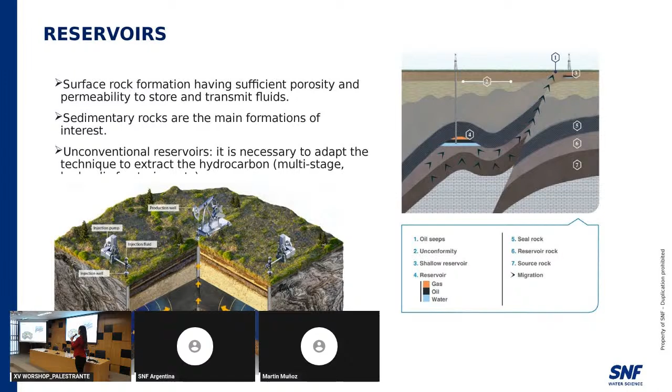We have a layer, let's say the reservoir layer in the soil, and we have injection wells where we inject fluids, and then we have production wells where we extract fluids. And we will not only extract oil, we will also extract water and gas. Okay, so this is a very important concept, because we will see that how much water we produce is very important.

Okay, so quick summary on stages of oil recovery. First one is primary, which is oil recovery through the own reservoir energy. I mean, if the reservoir has higher pressure than the atmospheric pressure, then we will lift it naturally, okay? So it will go to the surface naturally.

Also, we can have secondary recovery, which can be skipped and go straight to tertiary or EOR, but it's recommended to at least produce a bit by secondary recovery. Why is that? Well, secondary recovery is mainly trying to keep the reservoir pressure with water or gas injection. It's pretty much what we've seen here. We inject water, for example, and then we push the oil, and we produce a mix of fluids, okay?

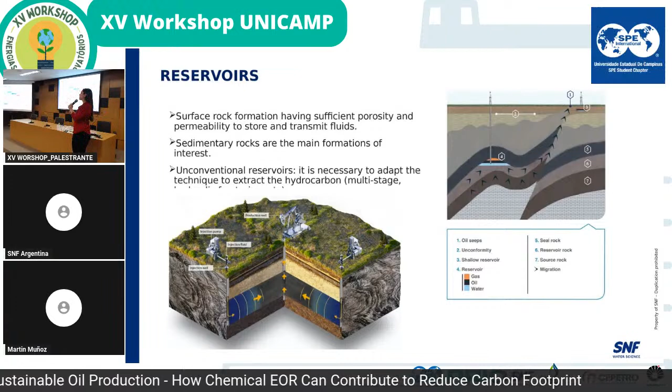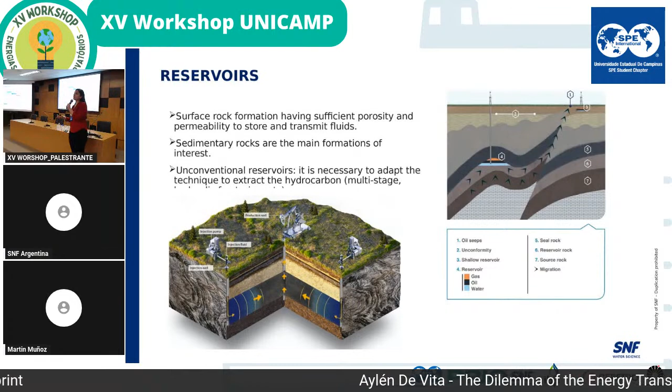EOR stands for enhanced oil recovery, which is when we try to go deeper, because secondary is not enough, or it's not cost effective, or we want to produce more oil, or we want to decrease water cut because we're producing too much water and we need to improve our percentage of oil.

So we have many ways of tertiary recovery, not just one. We have gas injection. You may have heard of carbon dioxide injection. Thermal, which is very used when we have very viscous oil, because it increases its temperature, so it lowers the viscosity. So lower viscosity, it's easier to move. And then we have chemical and other kinds of tertiary recoveries.

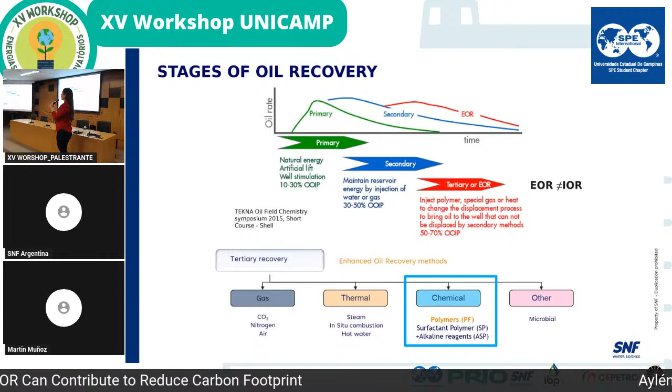We are going to focus on chemical, which is mainly polymer flooding. You are going to see PF many times. It means polymer flooding or polymer injection. And when I say water flooding, I mean secondary recovery. Okay. So we can also have surfactant polymer or alkaline surfactant polymer, but those are more advanced ways of tertiary recovery. We're going to focus on polymer flooding.

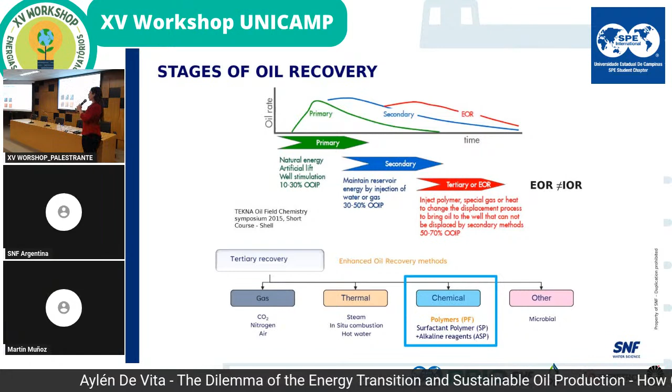So chemical EOR with polymer flooding is nothing but a viscous water flood. So I'm not injecting a high percentage of polymer. I'm going to show you right now what polymer is and what it looks like. But it's nothing but a water flood, more viscous. Okay. So basically we have this polymer that dissolves in water and increases its viscosity. And we have a very interesting effect.

I mean, you're going to ask, all right, so why do I switch to polymer? I could inject just water. Well, look at what water flooding looks like and what polymer flooding looks like. Polymer flooding reaches more surface with the same flow rate. So we can get through more pore space, and we can therefore get more oil in our production wells. Okay, why is that? Why does this happen?

Well, because we have this factor which is mobility ratio, which is basically the capacity of water to move oil, in simple words. So if we want to increase the mobility of oil, we can diminish water mobility. Okay, so to affect water mobility, we have to act on water permeability and/or water viscosity. So if we change both, this factor will be lower and we will move more oil. Okay, so this is with math and chemistry.

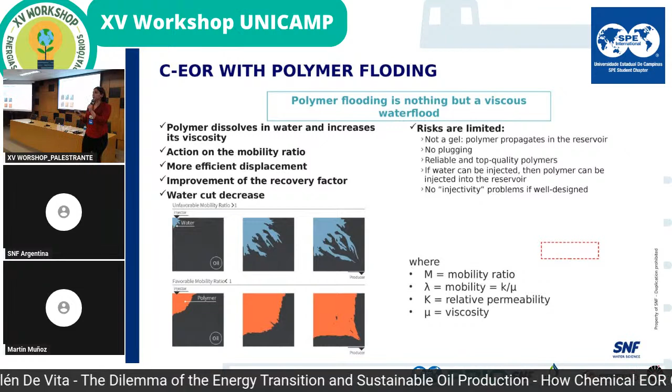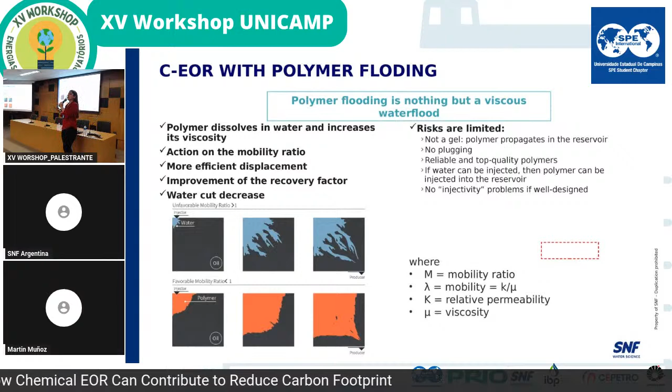Another good thing about polymer flooding, maybe you've heard of it, maybe not. Just for those who don't know and may have this question: hey, maybe I have a chance of plugging my reservoir? And the answer is no, I need a good design, but risks are very limited. Basically, if I can inject water, it's almost 90% sure that you can inject polymer too. You just need a good design and know your reservoir.

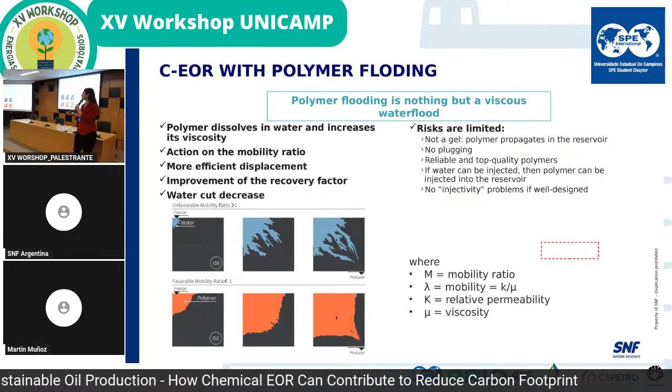So just a quick look on polymer flooding history, how we've evolved in the last 50 years. First, we have a few injections in the US in the 70s, and now, after a larger success in China and many countries, we have more than 300 projects all around the world right now.

Why did we have a larger success? Why did we evolve? Because we increased our application envelope. This is application envelope, I mean, where the polymer flooding can be implemented.

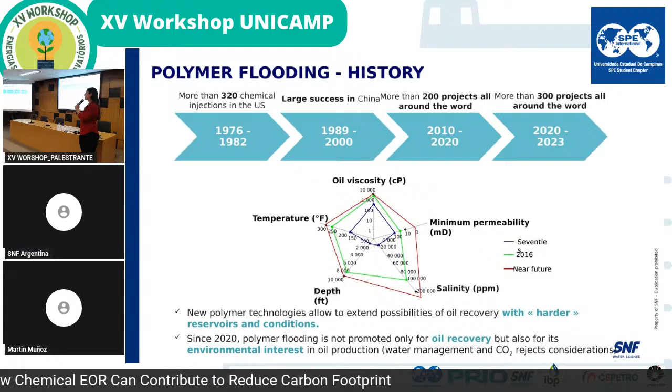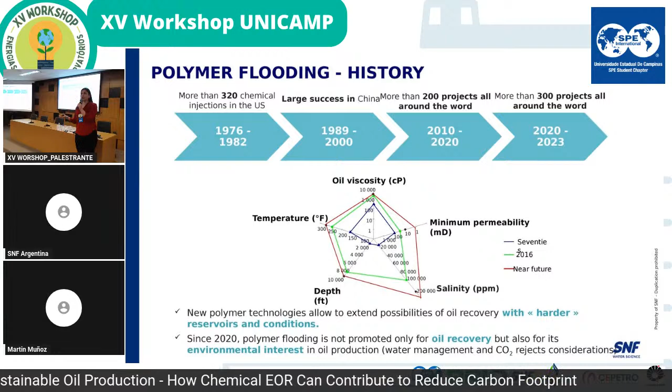In the 70s, polymer flooding could be implemented only in certain conditions of temperature, permeability, depth of the well, oil viscosity, and we have in the last few years increased that envelope of application because we have developed better chemistry, polymers that can stand and cope with harder conditions. So now it's almost possible to implement polymer flooding in every field.

So what are polymers? You may have heard this word before. It's basically repeated units of the same monomer. So we're having these monomers in chains, long chains, with a high molecular weight.

And for EOR, we use acrylamide-based polymers, not just any polymers. And the average molecular weights are between 3 and 35 million Daltons. That's a lot. And that molecular weight will give us more or less viscosity.

We usually use anionic to minimize the adsorption in reservoirs. And this is an example of how an anionic polyacrylamide looks when we join, let's say, acrylamide and acrylic acid, for those who like chemistry.

The important thing about polymers, I mean, why we use polymers and not something else? Because we care about this property, which is non-Newtonian fluids. Maybe you've heard that in some physics class. If we have Newtonian or non-Newtonian fluids, they behave differently. If we apply different shear rates, like efforts in a fluid, the viscosity may change or not.

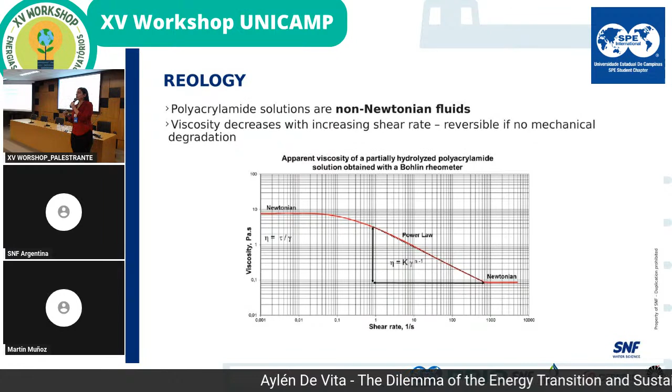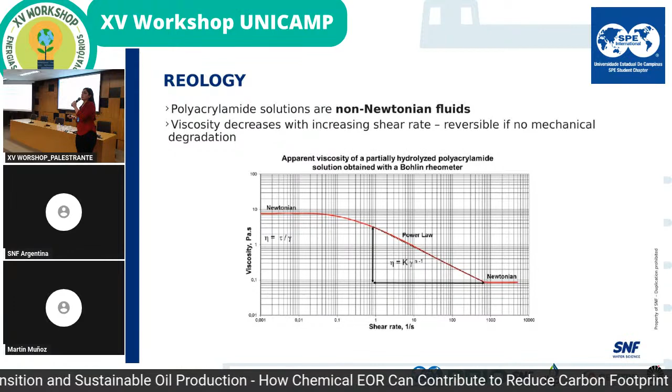In water, for example, it doesn't matter the strength I apply to water, it will always be the same viscosity. But with polymers, we have a decrease in viscosity at higher shear rates. So if we apply more strength to a polymer, it will diminish the viscosity. So this is a particular thing about polymers.

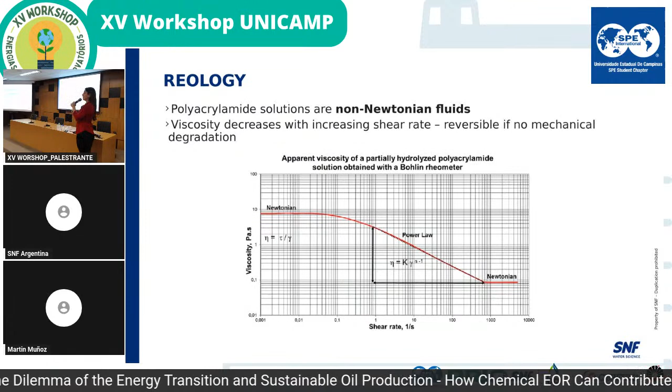They're called pseudoplastic fluids or shear thinning. You may have heard any of those concepts. And I'll show you now why we can tell visually that they're pseudoplastic, because I have polymer here. Okay, so let's get a bit more visual.

Polymer can be in two different forms for EOR, which are powder and emulsion. The main difference is, well, of course, one of them is solid, the other one is liquid, but the solid is 90% polymer, let's say active content, because we have 10% of humidity. So this is how powder looks. I'll give it to you to look at.

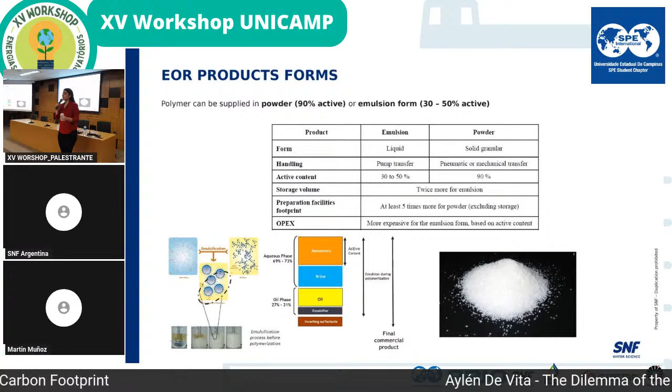So we have powder, which is 90% polymer active content. And then we have emulsion, which is liquid. So emulsion is 30% active content. And you will say, hey, well, why should I take emulsion if powder has more active content? Well, it depends on each case which one is better for application. Okay, I'll tell you now.

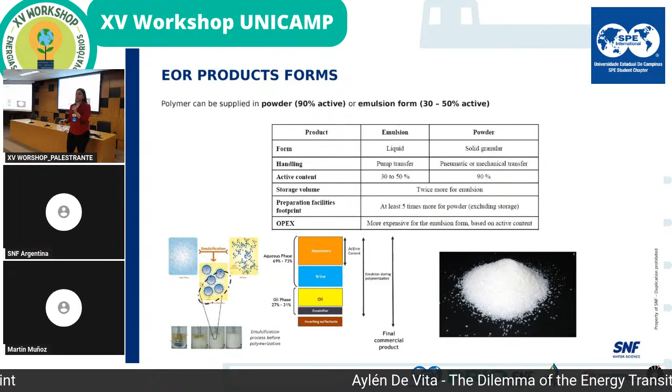So the main differences are active content, form, and how we transfer it. The emulsion can be pumped and the powder has to be hydrated. We cannot inject powder like that. We need to inject a fluid, so we need to hydrate it first. But the good thing is that we will diminish OPEX because we won't be transporting so much non-active content.

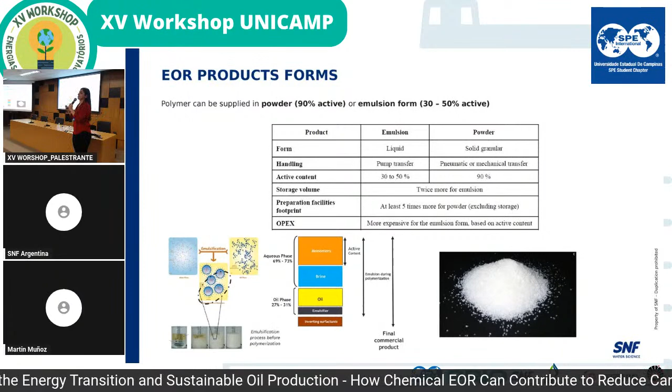So we use powder mostly for EOR when we are onshore. Offshore, we use emulsion. Powder requires a preparation skid to be implemented; what I was telling you, we need to hydrate the polymer. And for emulsion, we have a quick direct injection, and we don't need a maturation tank. I'll show you now what that is.

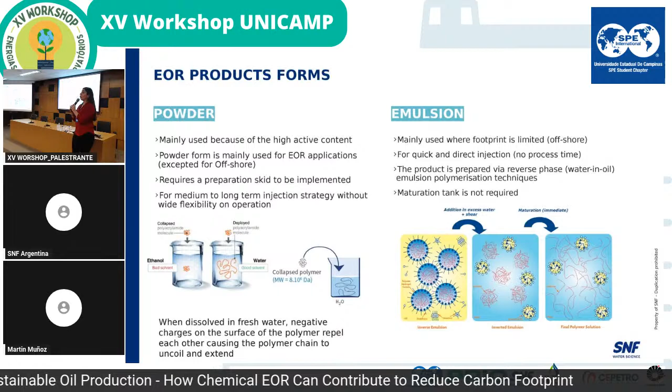So, in general, in both cases, we have a collapsed polyacrylamide. Well, this is mostly in powder, but we have a collapsed polyacrylamide molecule in solid state. And then when we put it in a good solvent, this collapsed polymer will open up. These chains will open up and will generate this viscosity in water. But we need time to hydrate the polymer and let it open up.

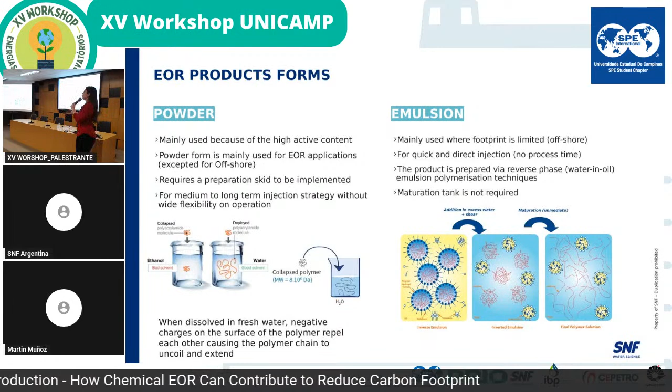And if we don't use a good solvent, like with ethanol, then the chains won't open up and we won't generate viscosity. Okay, so it's not only about the molecular weight, it's also about the solvent. They're basically prepared for water, but the water quality can be better or worse. So that's what I mean about water quality and viscosity development.

The lower the salinity, the better the viscosity, because the polymer is anionic, and when I put it in water, the chains open up and we generate good viscosity. But if we have many salts, like cations such as sodium, potassium, calcium, magnesium, then we make these charges attract, and the polymer chains roll in again.

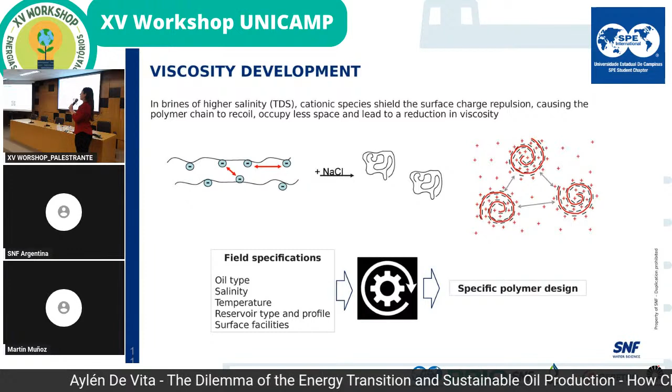So we lose viscosity, basically. That's why we need, every time, more developed technologies in polymers so that they can stand more salty waters. Okay. So basically, for field application, we need to know these parameters, and then we will choose a specific polymer design for my specific reservoir.

Okay. So application of the polymer. If we use powder, as I mentioned before, we need a maturation tank. This is real life. In the lab, we hydrate the powder in an overhead stirrer or magnetic stirrer. In real life, we have these polymer injection units, which can be moved from one place to another. In these injection units, we have the powder stored in a silo, in a hopper, and we hydrate it in something we call PSU, which is polymer slicing unit.

The polymer slicing unit allows the polymer to pre-hydrate with the water, and then this pre-hydrated solution goes to a maturation tank, which has a certain residence time and allows the polymer to fully hydrate and develop viscosity. Then, when we have this matured solution, we dilute it with water, we mix it, and then we inject it as a diluted final solution.

So, what does polymer look like? I'll show you. This looks like water, right? But polymer behaves sometimes as a solid, so it will have some resistance to flow. So this is what our solution looks like, a hydrated polymer solution. Okay.

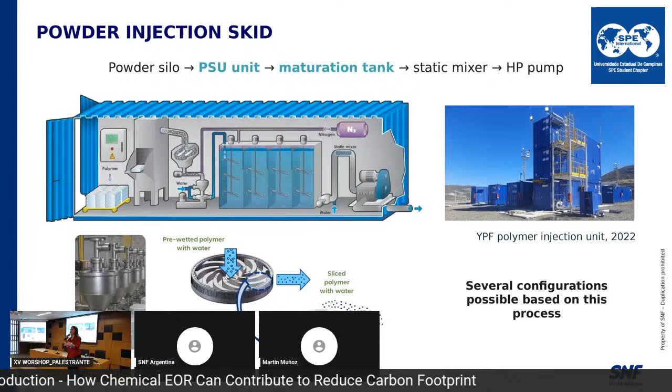How much polymer do you think we have in that solution? Just guess, like in grams per liter, ppm, percentage. What would you say? Any number? What? 5? Anyone else? 30? Well, it has 1%. So it's just 10,000 ppm. 10 grams of polymer in 1 liter. So it's a very little amount.

So you can guess that the density of polymer will be almost the same as water, but it will have different viscosity. Okay. So this is what our solution looks like. It's a highly concentrated solution, but we don't use this one for injection. We use a diluted solution. That's why from the maturation tank, we obtain something like this, and then we dilute it with water. We make it pass through a static mixer, and then we inject it as a diluted solution.

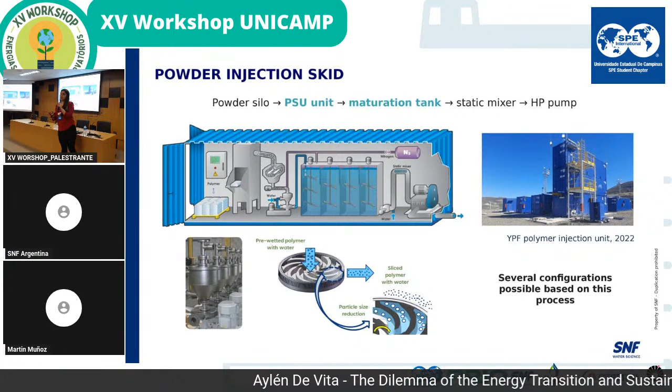And in general, in the projects I've been in, we inject from 300 ppm to 5,000 ppm, but still not big amounts. So yeah, we can generate viscosity with very little polymer. And also, we will have to inject a higher concentration if our water is worse. Let's say if it's more salty, I will need more polymer to achieve a certain viscosity.

Okay. So how do I inject emulsion, on the other side? I don't need all that maturation tank and PSU. I'll just inject it with a pump and dilute it with water. Static mixer, injection. Okay, so we save the maturation tank step. So any questions so far? We're good?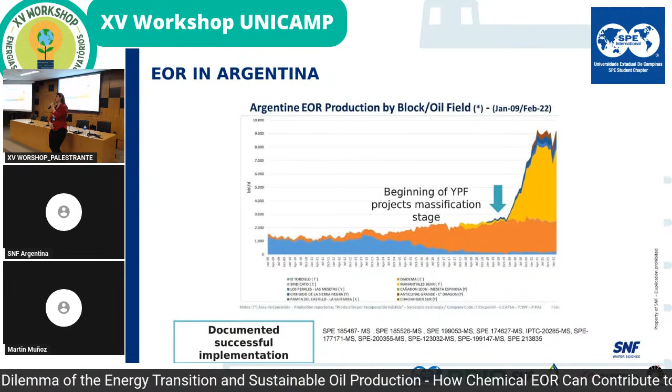This is where YPF, one of the biggest oil and gas companies in Argentina, started the massification of polymer flooding. What I mean by massification is we stopped injecting in 10 wells and now we're injecting in 100. When we massified these projects, we saw 9,000 barrels per day of incremental oil production.

So this is a documented success. We have the data here if you want to read a bit more.

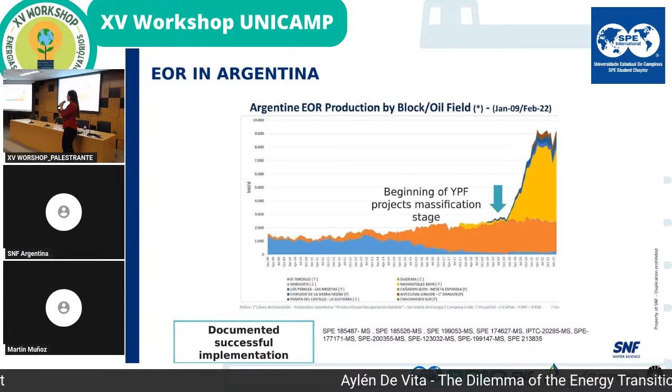When I see this graph, I say, all right, so we keep improving oil and gas production. How do we optimize this process? How do I know if a polymer flooding is well applied?

There's an interesting case in Manantiales Behr, a YPF company in Argentina, which optimized polymer flooding. They created a kind of circular economy model, different from other companies. They didn't just put the injection plant in place and let it inject for 10 years. They try to optimize where they inject and move the plant when they stop seeing a good cost balance.

This is a 3D model of a field. You can see water in blue, oil in green, and gas in red. So they find sweet spots - areas with the most oil in place.

They say, all right, let's inject polymer here, let's try to produce this oil. Then they detected many sweet spots and just put the polymer injection units in those sweet spots.

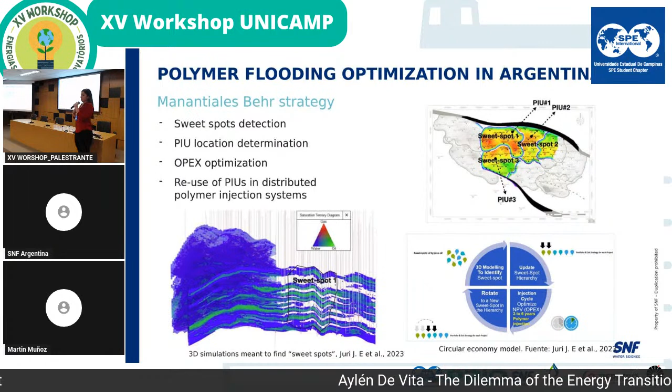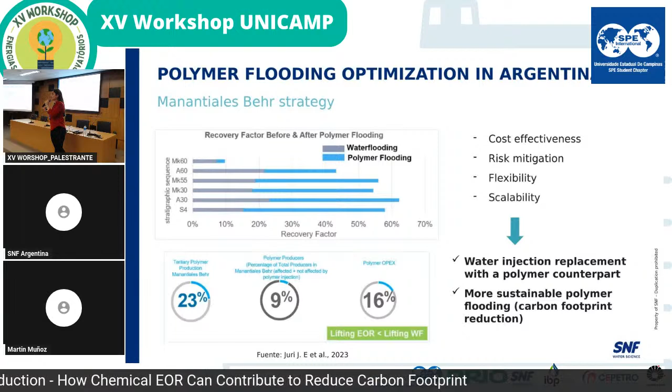That all being said, the main question I asked myself is: if we're in an energy transition stage, why do we keep putting efforts into oil and gas production? Why don't we just invest in other cleaner energy sources?

Well, the answer lies in our metrics of energy balance. According to many different sources of investigation, by 2045, 2050, we will still have a huge dependency on oil and gas. Oil and gas remains one of the sources in many scenarios, but not because we love oil and gas - it's because we need oil and gas for this transition. It won't be an overnight change.

So how do we keep producing oil while decreasing our carbon footprint, since that's the main target of renewable energies and energy transition? The previous example I showed you is a good case - we need to keep producing oil while we migrate to cleaner sources, but in the meantime, we can reduce our carbon footprint.

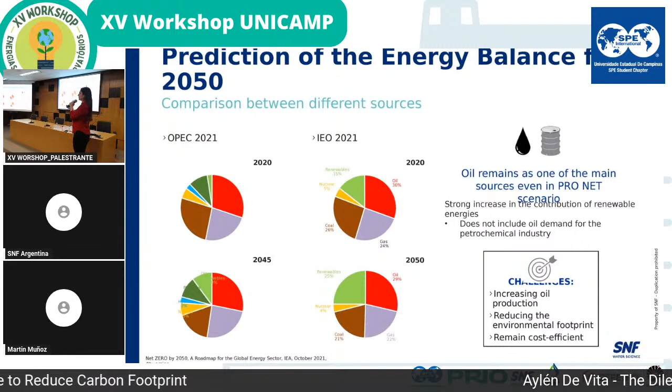Reduce per barrel of oil produced, in comparison to the previous ways of producing oil. So, some facts - I'm not going to say we have the cleanest way of oil production, but these are actual environmental facts that show polymer flooding reduces carbon footprint and carbon dioxide emissions in comparison to water flooding.

This is our current situation, and this is where we're heading with polymer flooding. If we inject these barrels of water flooding and these barrels of polymer, we will produce with water 1 barrel of oil, with polymer let's say 3. This is a typical example - of course it can be more, it can be less.

So how much do I have to inject and how much do I produce per barrel of oil? In water, I have to inject 10 barrels to produce 1. In polymer flooding, 3 and a bit of barrels - so I should inject less to get the same. How much water will I produce and have to treat? I'll produce 9 barrels, and with polymer I will produce 2 and a bit, so I will have less.

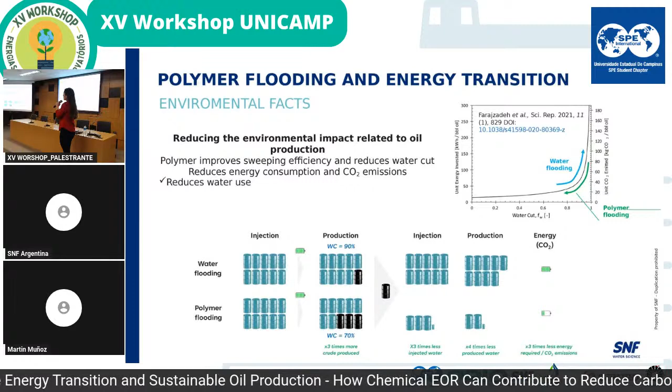But if water cut increases too much, then the carbon dioxide emissions increase a lot. So I can diminish that by using polymer flooding.

I don't want to go too deep into the math, but I just want you to know there exists a real calculation method to determine carbon dioxide emissions. One of them is to compare before and during polymer injection, like this point to this point. The other one is an integral method, which is more accurate because we analyze the whole production with polymer and the one we would have had with water.

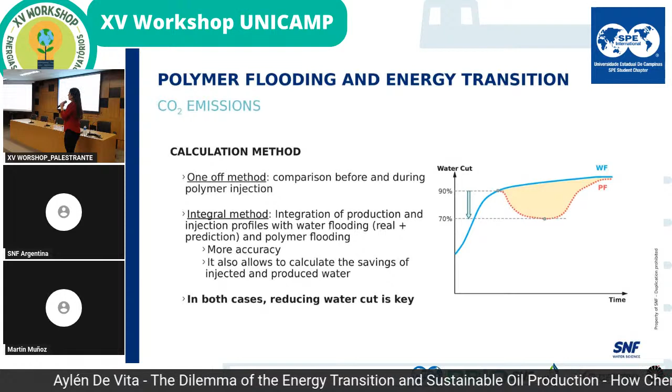Just the important thing is that with water flooding we increment water cut. With polymer flooding, we decrease it and then we increase it again, of course, until we find the equilibrium. We are interested in this zone - this will happen with years of polymer injection.

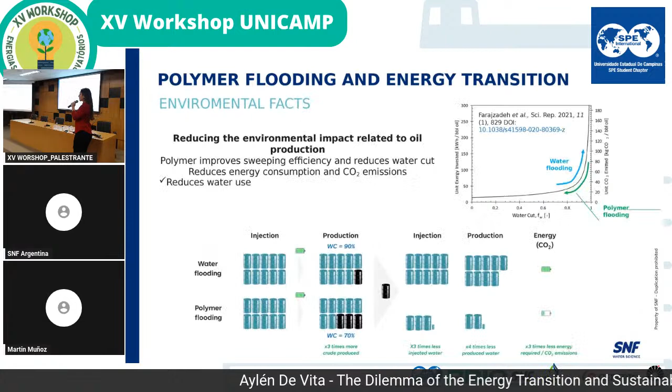So, math - we're engineers, so we like math, but just for you to know how to calculate total carbon dioxide emissions: the total amount is the energy consumption, the energy used for polymer manufacturing, because we're using another additive, so we have to consider how much carbon dioxide I emit by producing it. And then other chemicals and products that are used in water, and how much carbon dioxide they produce - so this is how we calculate CO2 emissions.

Energy consumption will be a summary, a sum-up of many things like pumping energy, lifting energy, water treatment energy, and heater energy. This is an important term because if we require a lot of energy to treat water, and we reduce the water cut, then we will have to treat less water and we will reduce that energy - so we reduce our carbon footprint.

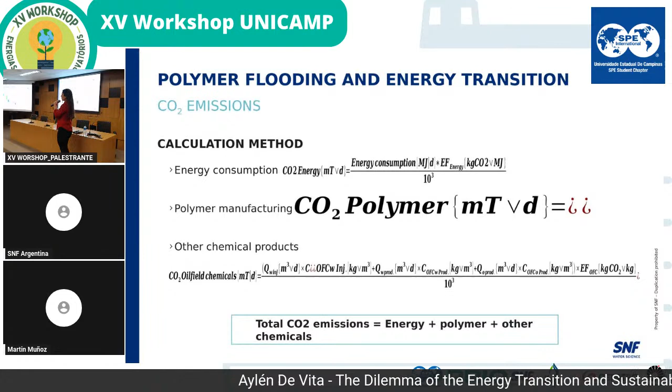Just one case I wanted to mention. I have a few cases in which we made the calculations of carbon dioxide reduction, the savings in each stage of the project. With water flooding, we used to produce 32.5 kilograms of carbon dioxide per barrel of oil produced, and by implementing polymer flooding, we went to 5.6. Why? Because with pumping, we reduced 20% of our carbon footprint.

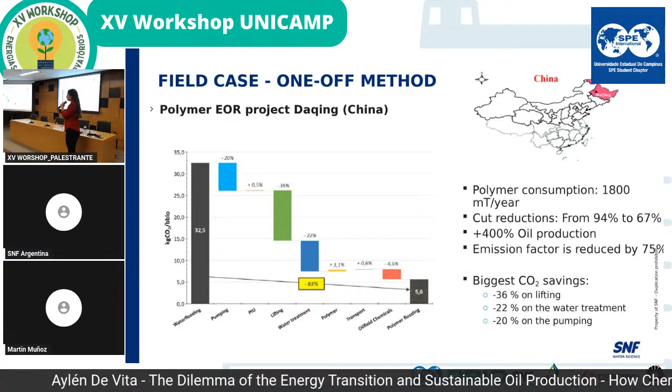With the PIU, the polymer injection unit, we increased it a bit because we are using energy, pumps, etc. Then by lifting, the lifting energy reduced 36% of the carbon footprint. The water treatment also decreased because we have less water for treating, and so on.

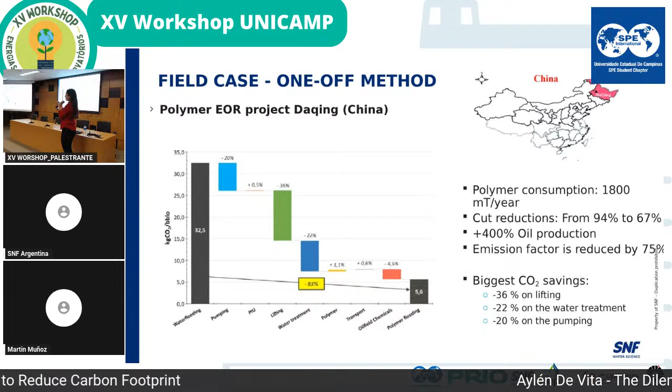These cases are very interesting because in many countries - in China, Alaska, Argentina, as I told you - we see the same results: the production, the carbon dioxide emissions, the production with polymer flooding and water flooding, the difference that we have, how much the water cut is reduced from 70 to 20%, so 50% less water to treat. I mean, we don't need to go deep, I just want you to have that data in mind.

This is another case by the integral method, also from 7 to 2.1 - sorry. So we have a lot of savings in carbon dioxide per barrel of oil. Well, this is interesting.

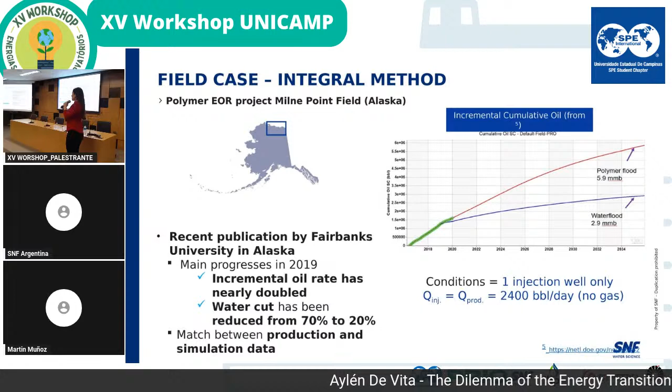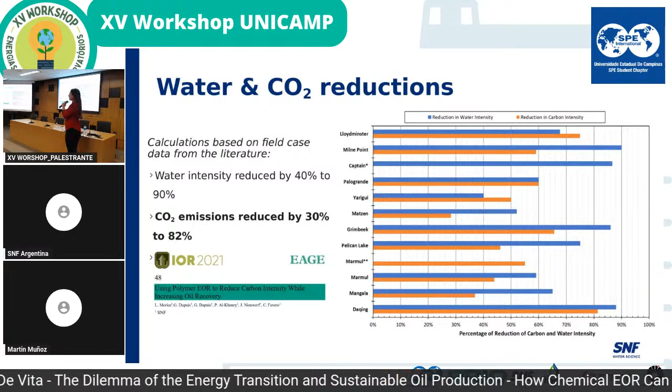So we have a lot of sources that allow us to say this stuff really works. We have good savings. With polymer flooding, we reduce our carbon dioxide emissions. At first we increase it until we see the response in the reservoir, until we have this incremental oil production, which is not instantaneous. But we know that after a while we have this reduction in carbon footprint. And then the question is, all right, so we reduce the carbon footprint by injecting polymer, and what are the next steps?

Optimization, moving from water to polymer. Well, we have another step, which is using ECOPAM polymers, biosourced raw materials polymers. So, reducing the carbon footprint in polymer production. What do I mean by that? When we produce polymer, we use acrylamide and acrylic acid, and acrylamide comes from acrylonitrile, which comes from propylene. So propylene can come from crude oil, non-renewable energy sources, or cleaner sources like biomass. So the proposal is to generate a good handprint by using renewable biosource to generate the propylene, acrylonitrile, and acrylamide for polymer production.

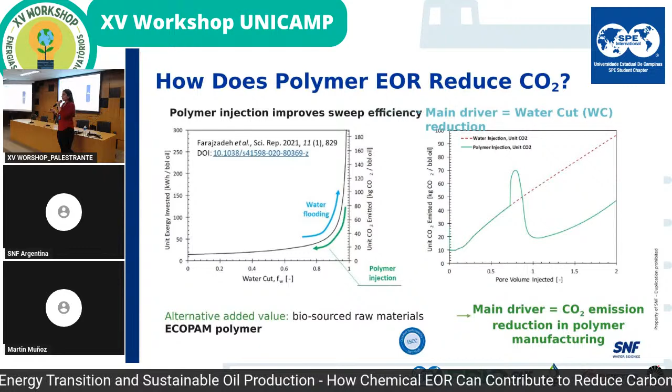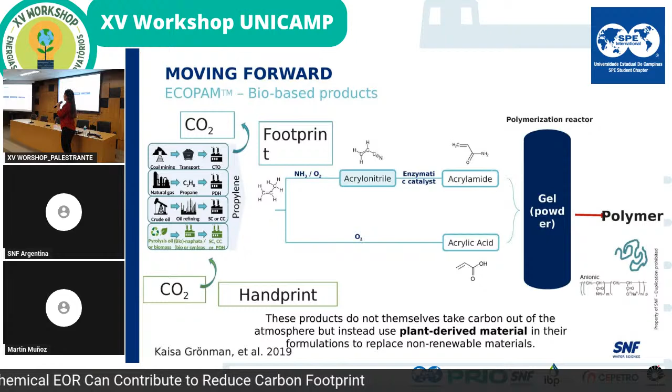So this is another way of decreasing carbon dioxide emissions. We can go from zero emissions, meaning we can have a full bio-based origin, a full fossil raw material, or a combination of both, which is more achievable. So we generate zero carbon footprint by using 70% of biosource raw material. We don't need to replace all of it to generate 0% of emissions. So this is our next step as SNF.

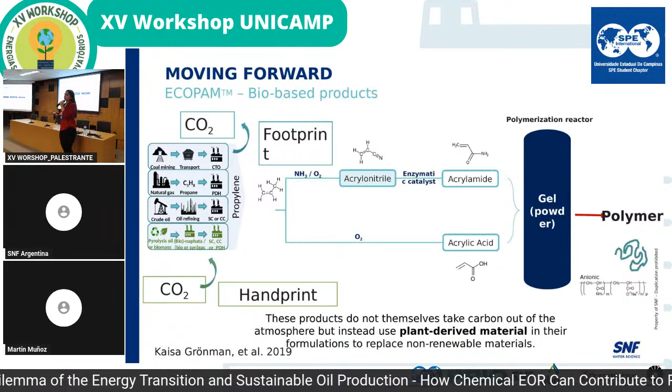So I think that's it for today. Thank you.

The world's population steadily grows. Land use becomes more developed and urbanized. At the same time, the demand for natural resources increases. We must preserve these supplies that are so vital for life, especially water. SNF offers solutions to water reuse and recycling. SNF is the leading global manufacturer of water-soluble polymers, providing effective solutions to the preservation of valuable natural resources in all aspects of our lives. Every year, SNF manufactures over 1 million metric tons of polyacrylamide-based products, while investing 2% of sales in research and development to continuously create new products with improved performance to treat the world's waters. SNF's core businesses are all linked to water: the production of drinking water, the treatment of municipal and industrial wastewater, water recycling and mining, oil production and enhanced oil recovery, agriculture, paper, textiles, construction, and personal care. SNF specializes in water chemistry. Our products are applied everywhere water is used, recycled, preserved, improved, reused, and modified. SNF, preserving natural resources with the environment and future in mind.

Okay, so that was a bit of publicity of SNF. Just for you to know that we sell polyacrylamide, which has many uses. One of them is EOR application, the one I explained, but we also use polymers for different industries like paper and water treatment. It's not just EOR. In Argentina we mostly focus on EOR, but it's not the same case in all the world. So just for you to know, but it's basically polyacrylamide products with some variations, but basically polyacrylamide.

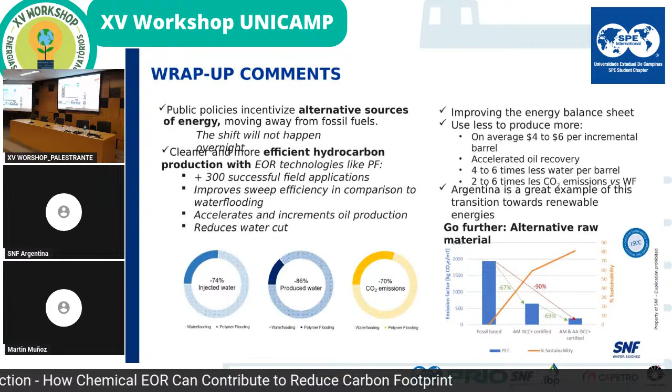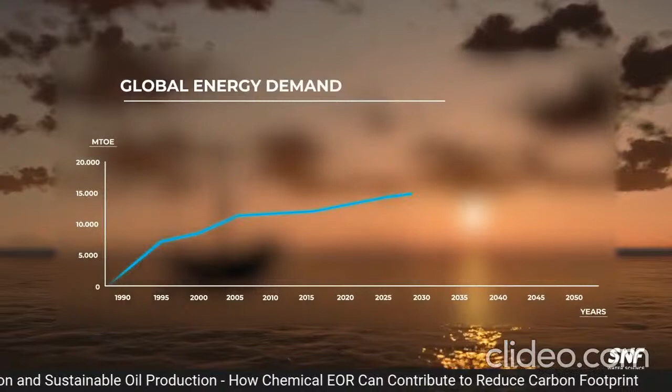SNF, for easy, cost-efficient, and sustainable EOR solutions. In a world where the energy demand continues to climb, oil extraction must be done in an environmentally responsible way. For EOR operations, this means reducing CO2 emissions. When changing from water flood to polymer flood, the water production can be reduced from 9 barrels of water to 3 barrels of water per produced barrel of oil.

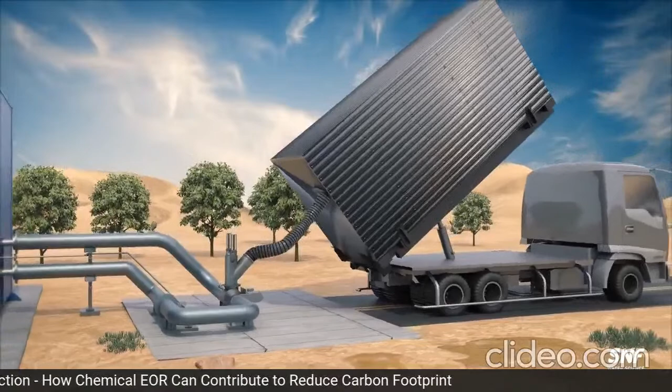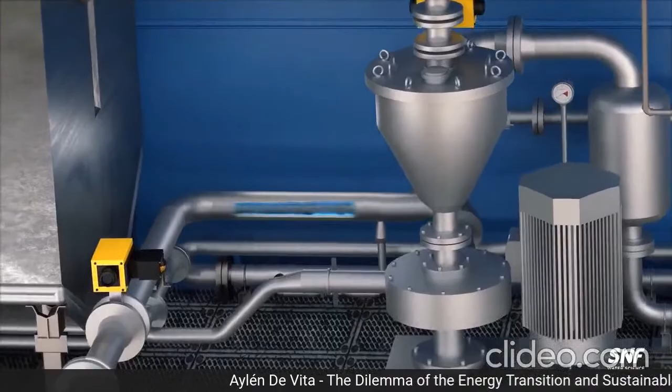SNF achieves this with modular plug-and-pump installations for quick and cost-effective unit implementation with many added benefits. Polymer flooding involves increasing the viscosity of injection water to enhance sweep efficiency and ultimate recovery of oil within a deposit. SNF assists clients through every step of the process, from assisting screening and reservoir studies, polymer logistics, to on-site storage, mixing, and injection.

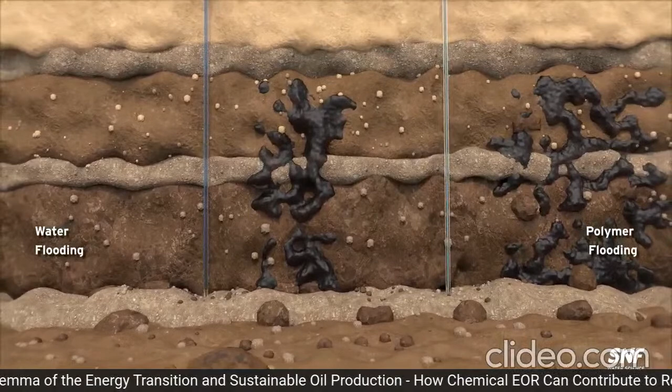SNF designs, implements, and operates on-site facilities for the client. Polymer flooding has a higher added value than water flooding. Due to the greater sweep efficiency of polymer flooding, the overall recovery will be accelerated with significant water production reduction per barrel of oil. Using SNF system, clients' water cut went from 90% to 70%, which means 3 times less water production per extra produced barrel of oil, savings on lifting operation and production costs.

These benefits also result in a reduction of up to 3 times in greenhouse gas emissions during the operations. SNF improves the efficiency of oil production processes. Because polymer flooding is easy to implement and more mature than other methods, development time will be significantly reduced.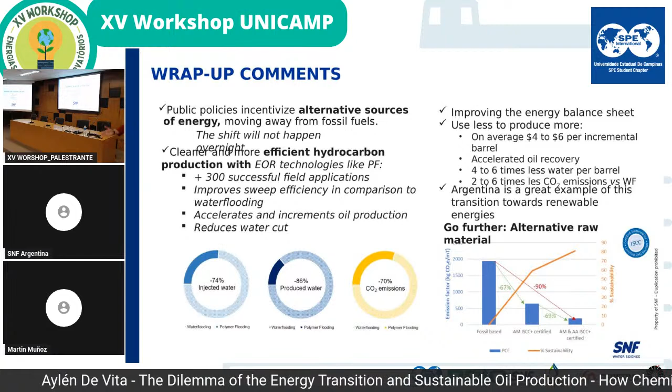Okay? So thanks for the video. And well, questions? Or you understood everything and you didn't understand anything? Please. Yeah.

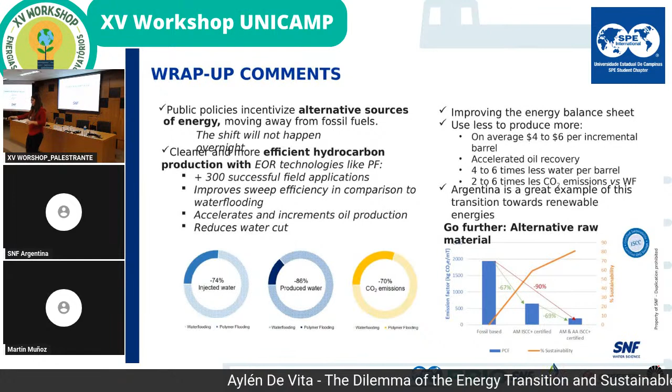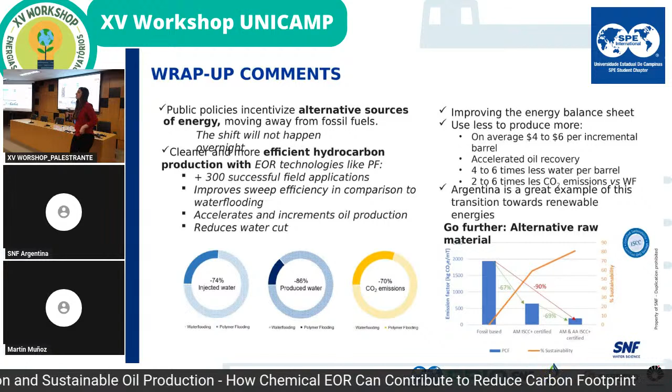Thank you for your nice presentation. It was really interesting result. So I have a question about your video, you talk about the lifting, and it has a really large drop in CO2, a decreasing trend. So can you describe more about that? How is it decreasing? So the lifting process?

Yeah, because we are analyzing barrels per barrel of oil. So if we need to treat less water, we need to lift less water. It's basically that. I mean, we're reducing our water treatment. You have the pumping energy that you would use for water treatment, and you are not because you have less water, and the lifting energy. So when we reduce water cut, we reduce both. You know that.

Maybe I'm not understanding. Tell me. Can you elaborate more? I mean, what do you exactly mean by lifting? Do you mean the water that you get from the sources that you want to make the treatment, or is it another meaning of this? Hold on. I'll try to find a way. I don't find the word to describe what I want.

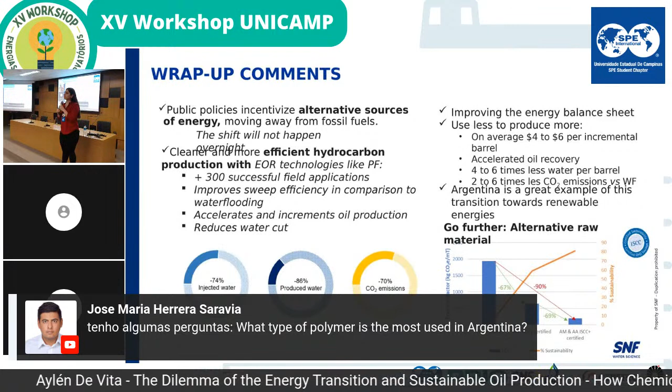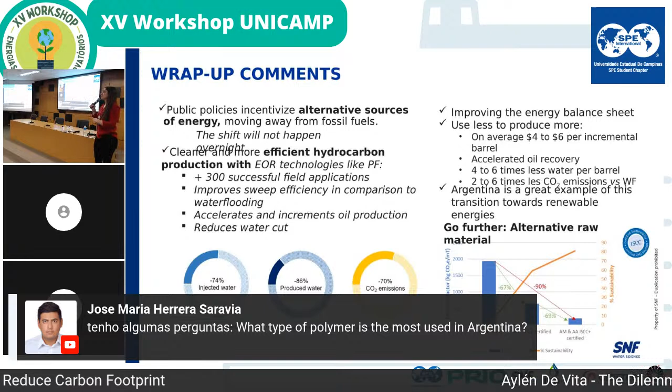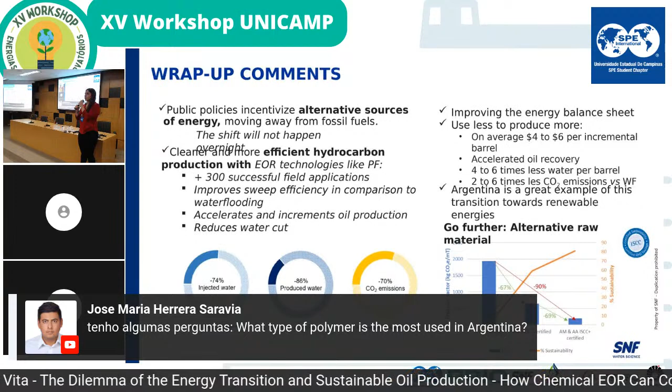On YouTube, we have a question: what type of polymers are the most used? In Argentina, the most used polymer, thank you, Jose Maria, is regular copolymer, anionic, Flopaam. We are starting to use Flopaam products which are more resistant to salinity and temperature, I mean for harder conditions, but we are starting to implement them.

These kinds of technologies require a group of ATBS, which is a tert-butyl, like a huge molecule that stabilizes the polymer and allows it to be more resistant in worse conditions. We're starting to use those polymers in Argentina, but still a great percentage of the polymers are regular copolymers, high molecular weight.

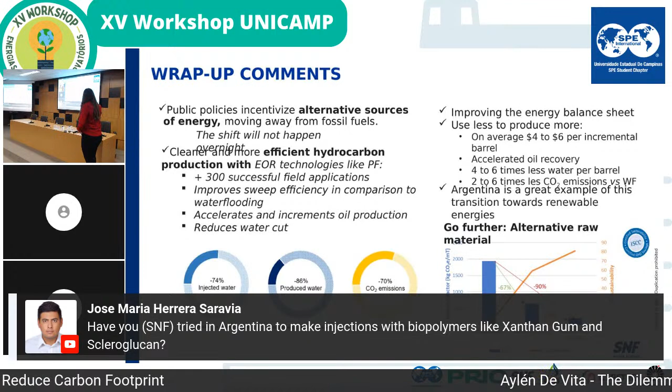5150? It's 3630. Yeah, Flopaam 3630. I didn't say the number because maybe you didn't know it, but yeah, it's the one sold in Argentina. We have another from the US, right? No, we just inject synthetic polymers like polyacrylamide. No.

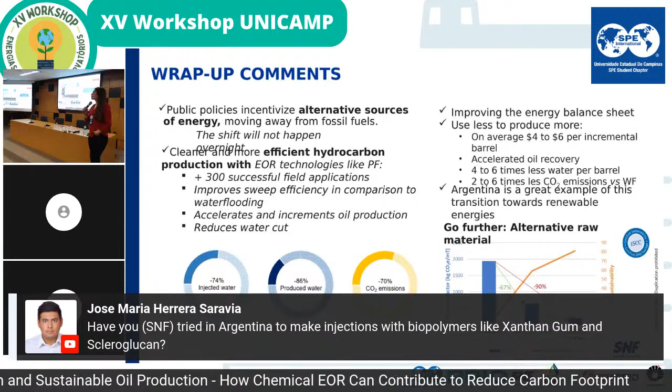How do fluctuations in oil prices and market conditions impact the feasibility of the implementation of polymer injection projects in Argentina? Well, a polymer project can go from cost-effective to non-feasible in one minute. One of those factors is oil price. If oil price lowers, then I can invest less money in recovery techniques. So it would affect polymer injection projects. They can stop being profitable, and maybe they could stop injection. Yeah, for sure.

How much is the ton of 3630? Do you know the cost? I would say 300 tons a day, if I'm not mistaken. 300 tons a day. The cost, $3 a kilogram. Depends. 3.5, 2.8, depends. Yeah, I'm not very into the costs. Fortunately, I'm on the technical side, but it's an important question.

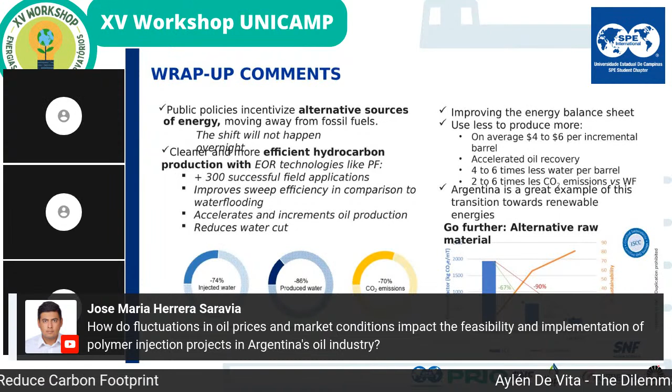I'll take the water. If you want to come and see the polymer aspect or touch it.